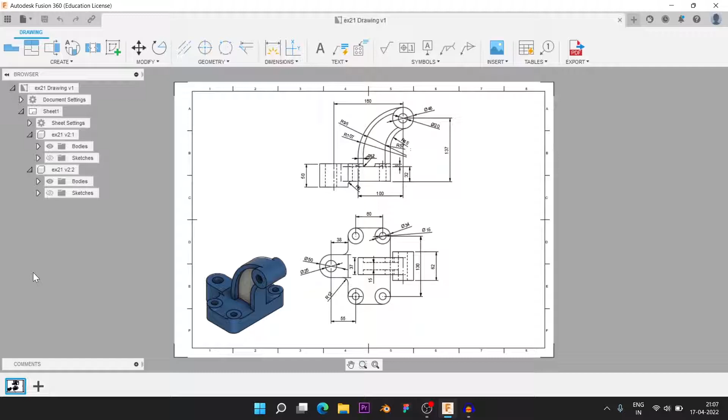Today we are discussing exercise 21. In this exercise, we are creating this model in our component. This is the drafting of this component. Here is the top view and here is the front view. I'm starting from this front view.

First of all, I'm making this sketch. Then I do the extrude up to 32. Let's start.

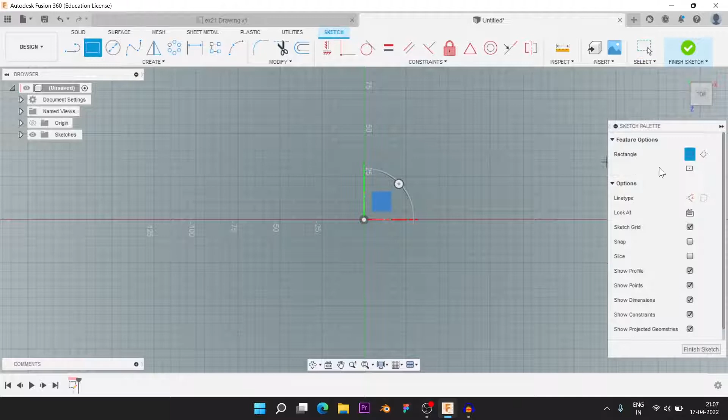Just selecting the top view and making one here rectangle. I'm creating here the center rectangle like this.

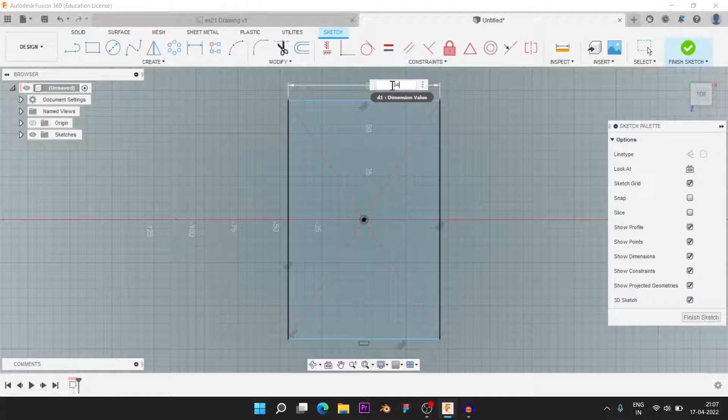After that, I'm giving the dimensions here. It will be 60 plus how much, here 17 and here 17; 60 plus 34 and here 130 plus 34. So giving 60 plus 34 is nothing but 94, and 130 plus 34 is nothing but 164.

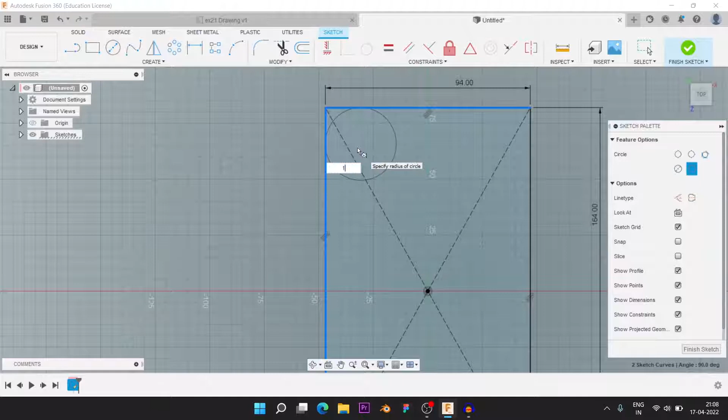Yeah, like this. After that, just I am giving here two circles. The circle will be a two tangent circle. The first tangent is this, and the second circle, how much radius is it providing? So I'm giving the radius here 17, like this.

Now I am creating one more circle over here of diameter 15, like this. Yeah, diameter 15. Second circle is of diameter 15.

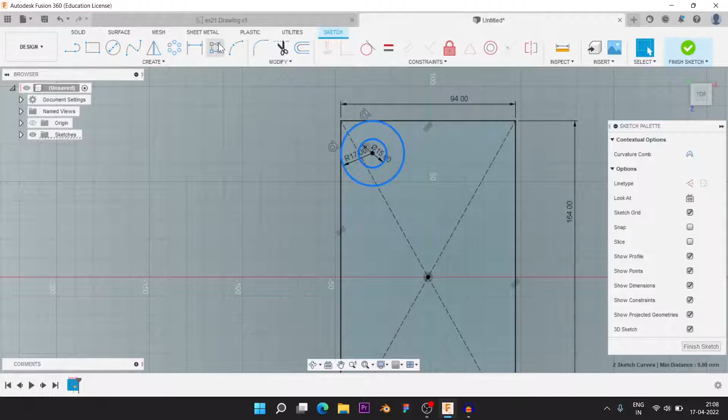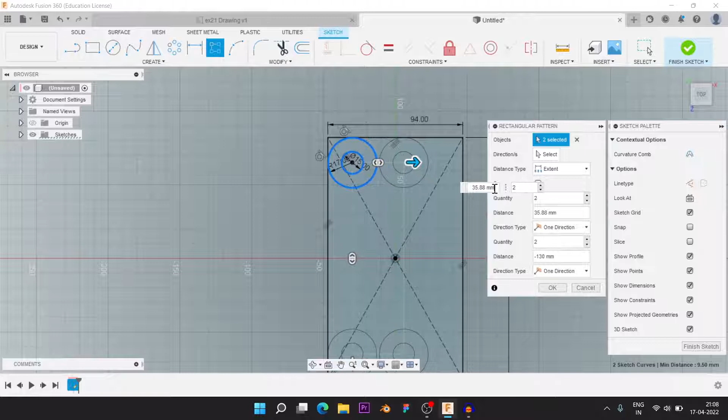And now I'm selecting both two circles like this by pressing Ctrl and doing here the rectangular pattern. Just moving this arrow somewhat like this, and here the quantity will be 2. The distance I am providing in the downward section is minus 130, like here. And in this direction the quantity will be 2, and the distance I am providing here will be 60, like this, and enter.

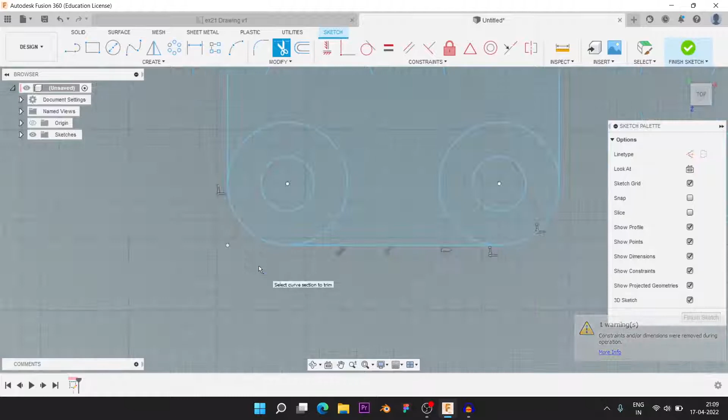After that, I am trimming the unrequired section, which is this, same here and this, here too, like this. Perfect. After that, just making this section over here.

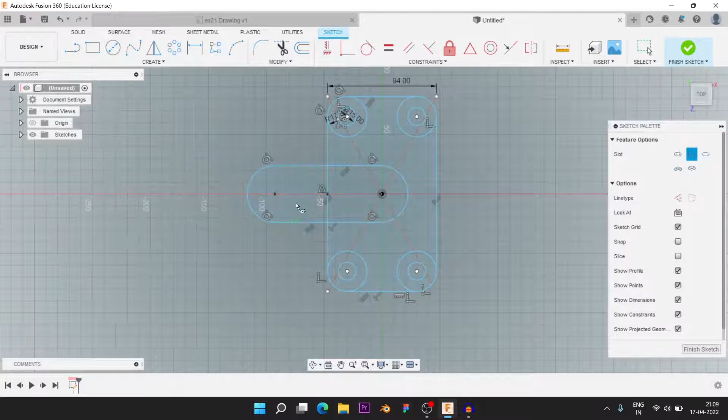For that, I am using the slot feature over here, slot, and here I am using the center point slot. The center and here the slot like this, and just taking the slot like, and just giving the diameter.

Here it is 50 and 25. Two diameters as providing like this. One is circle like this. Just giving the radius here is 25 and the diameter here is 25.

I think so, let's see once again. Yeah, the diameter is 25, and the outer circle here is of radius 25, like it.

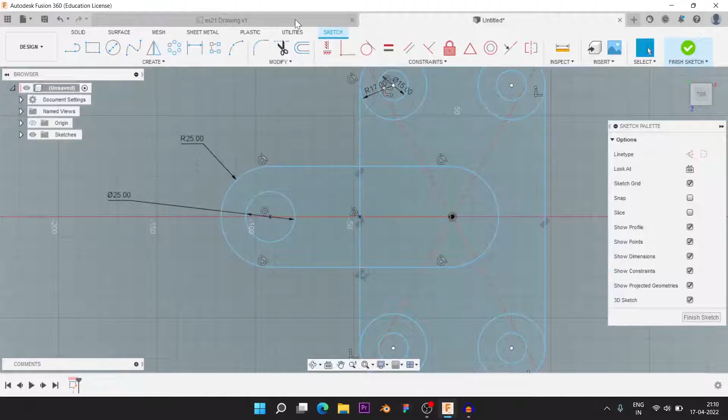And just the distance as providing from here to here is 55. Just go to the distance from this point to this point. Here it will be how much? 55, like this.

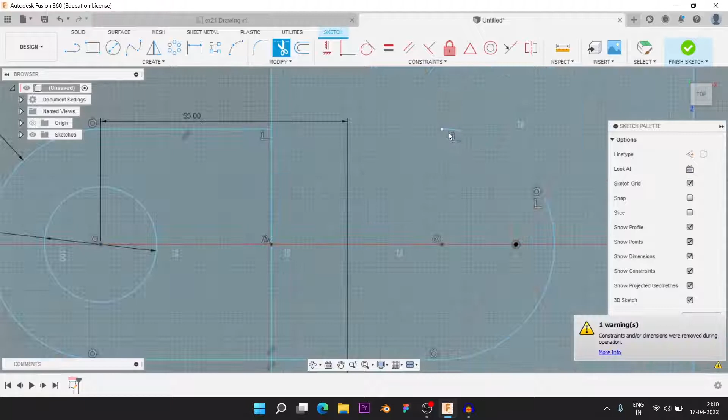Perfect, and just trim the unrequired section, this. Here and this section I doesn't require, here too. Perfect, like.

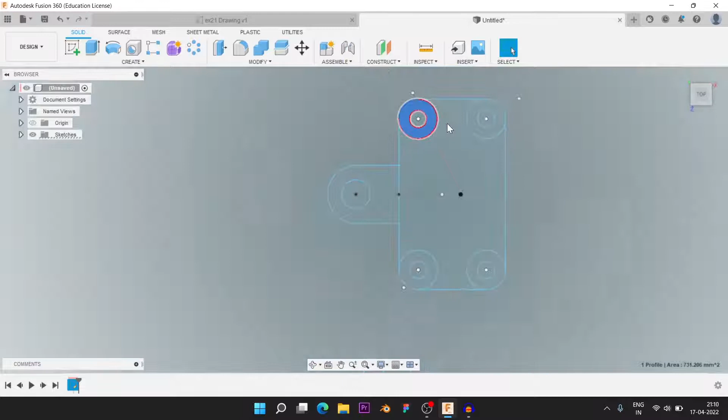After that, just finish the sketch and just select the required section. I'm selecting this outward section here like this, but I doesn't require this. Just pressing the Ctrl key, it unselected like here, and I doesn't require this line too.

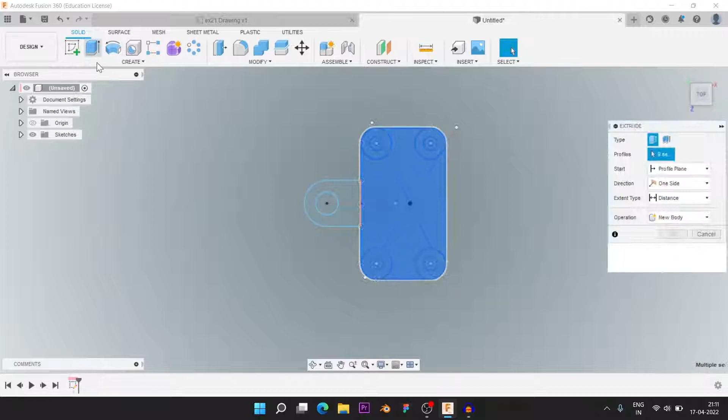Now I'm using here the extrude feature. I want to extrude up to how much? Here 32 mm. Just go to the extrude and orbit it somehow, and just providing the value in the negative sense, so minus 32 like here, and then OK.

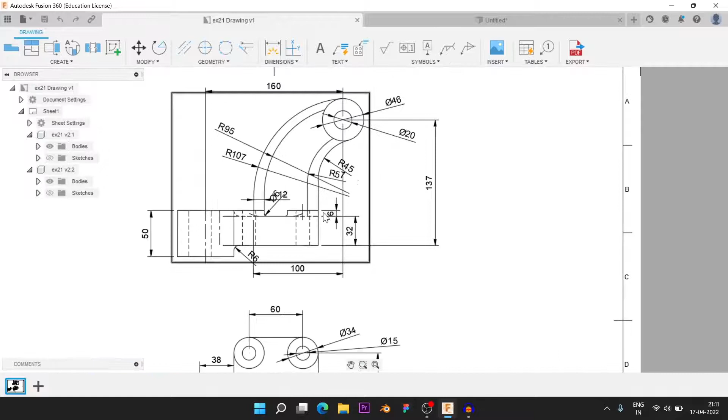Just go to the sketch, visible the sketch here, and the outer circle is extruded up to 6 mm. For that, I am selecting these circles first by pressing Ctrl like this, and just providing the extrude up to 6 mm.

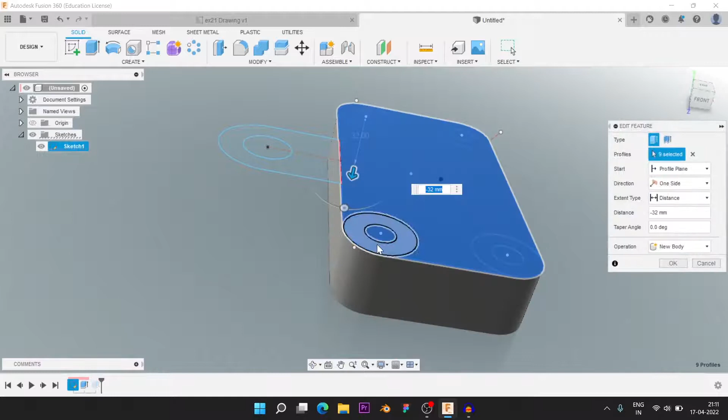Like this and enter. Once again, I'm going to this feature, just selecting by pressing Ctrl and selecting this circle for the whole feature and here. Then okay, like this, perfect.

After that, there is an extrude of this feature or this part, but in two sections: the first section is at 6 mm and another section is at 44 mm. The total goes to 50.

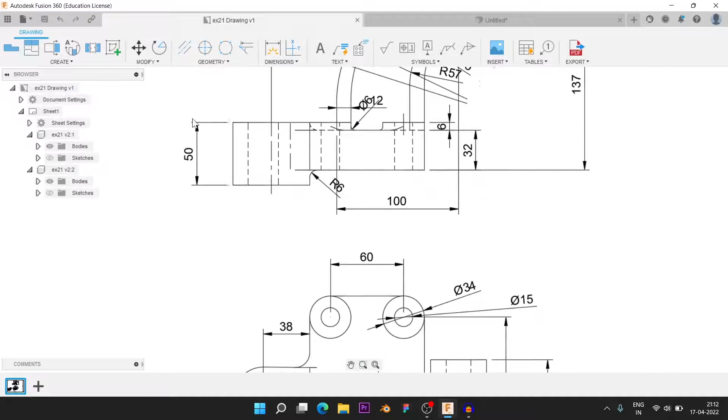For that, I am selecting this profile and the direction here I am using is the two side. The first side here, upside, it will be 6 mm, and the downward side it will be 44 mm. This total is equal to 50 mm. Then enter.

For making this section, I am using the front plane. For that, just go to the sketch and selecting for front plane here, like this. Once again, just finish the sketch.

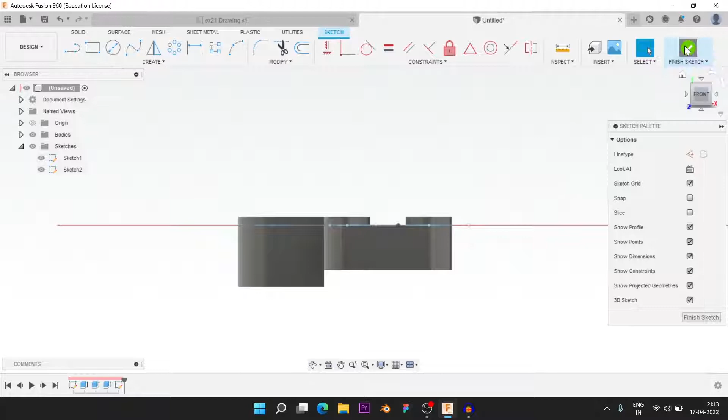Like here, just I am deleting this sketch and sketch, selecting this profile and front. Yes, perfect. Now I'm making the circles.

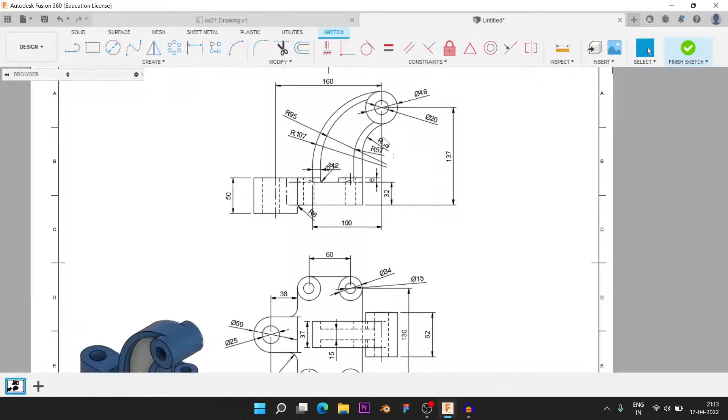Like these two circles I am making first of all, and just giving the dimension. One is 46 and another is 20. So the dimension 46, enter, and another is 20 here, like this.

After that, from here to here, the dimension provided will be 137, and from here to here it will be 160, or the center of this circular section or the slot section, it will be 160.

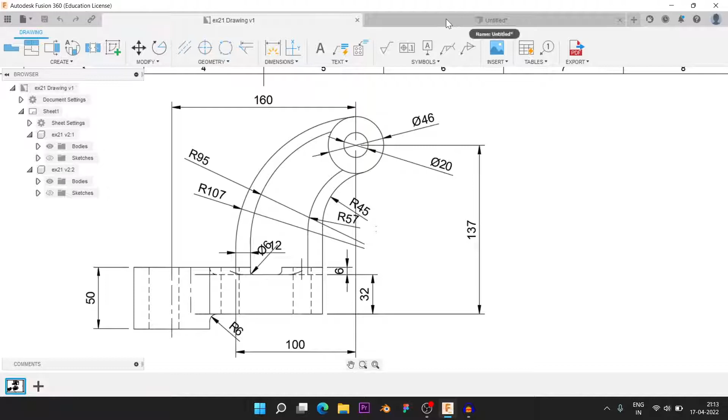Means from this point to this point in the horizontal sense, it will be 160, enter, and here it will be 137. I am right, 137 and 160.

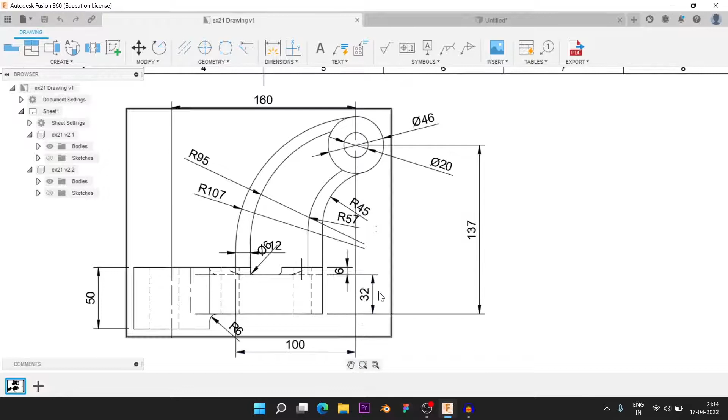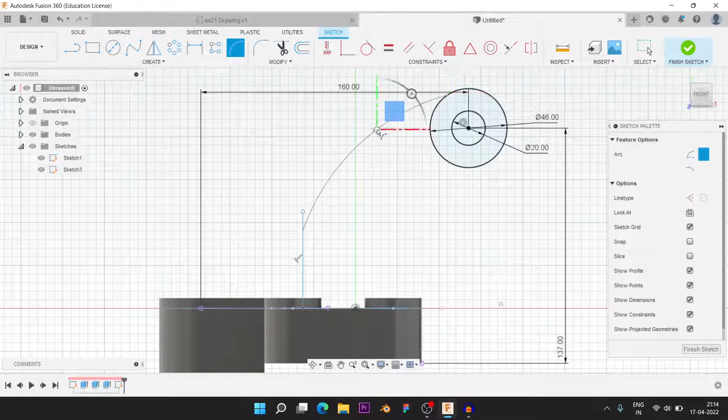Enter. After that, go to the 3-point arc, selecting any random point, and making this one arc. After that, I'm going to the constraint and using the tangent constraint, making this line and this profile tangent.

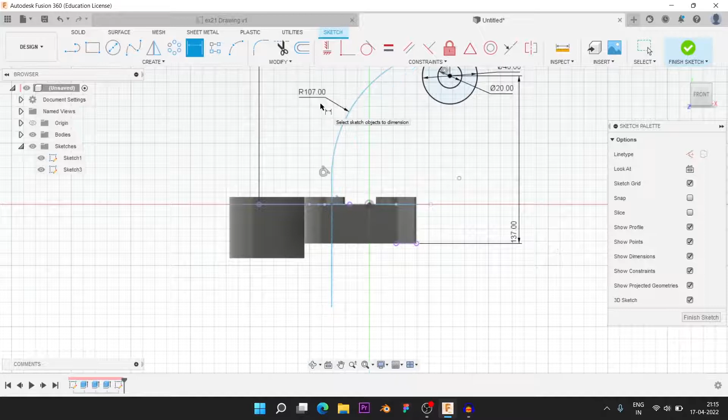After that, going to the coincident feature, selecting this point and this point as coincident, and providing the dimension of this arc. It will be 107, and the distance 100. So distance here, how much? 107, and from the distance here to this point, it will be 100.

Enter, like this. But this point is connected to this line. For that, I'm using the coincident feature and selecting this line and this point.

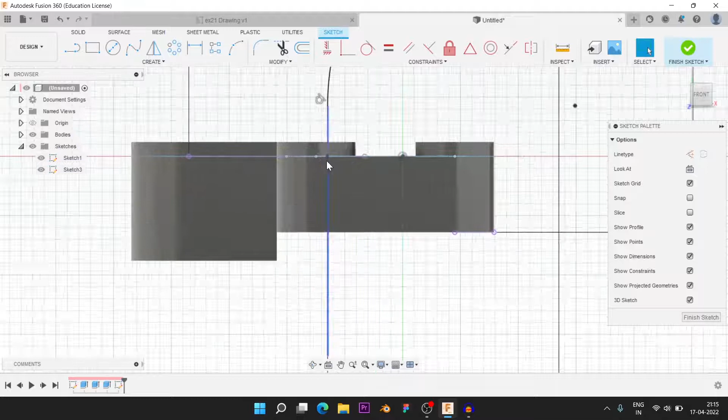Let's just trim the unrequired part. I want the line up to here only, but the tangent is perfect, and here also tangent. The main important thing is the tangents and the line.

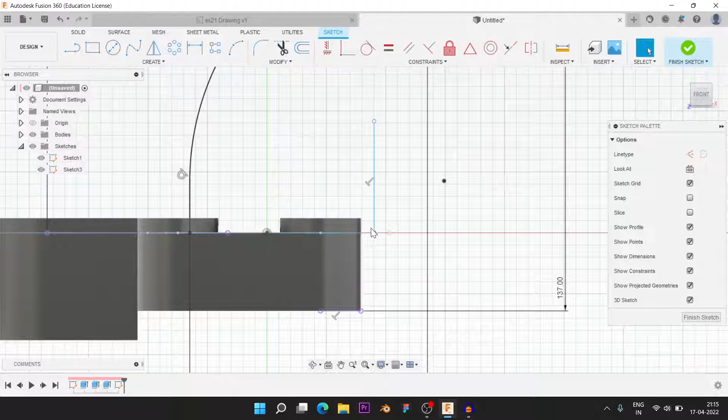The next line is providing over here. For that, I'm making a random line like over here. Just go to the coincident constraint and select this point and this line. After that, I'm making once again the tangent arc feature like this.

Go to the tangent. This arc and this circle will be tangent over here, and giving the dimension here the radius of 45. Here it will be 45. Enter, like this.

After that, just making this point and this point will be coincident, like yes, same. It's perfect.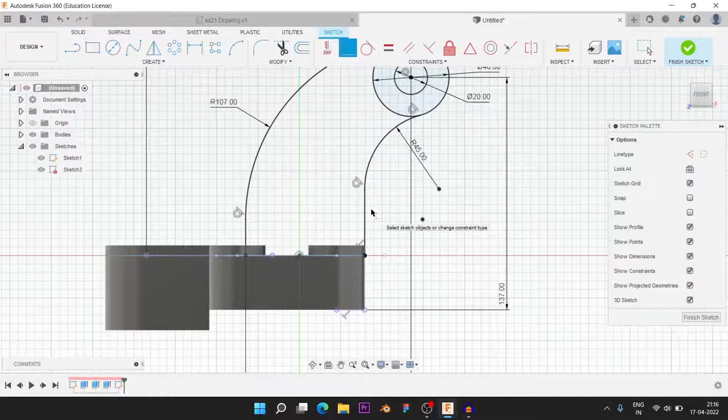Now just finish the sketch. Before finishing the sketch, just close the sketch first of all. Closing the sketch here. Now it's closed. Just finish the sketch.

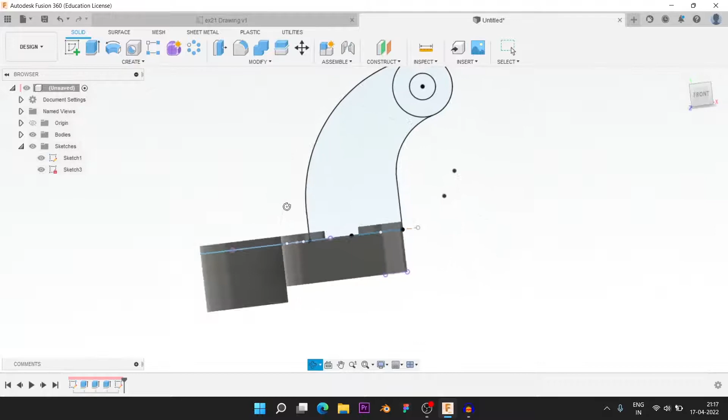After that, just rotate it somehow like here and extrude it up to how much? 37. In the symmetric direction, the whole distance will be 37.

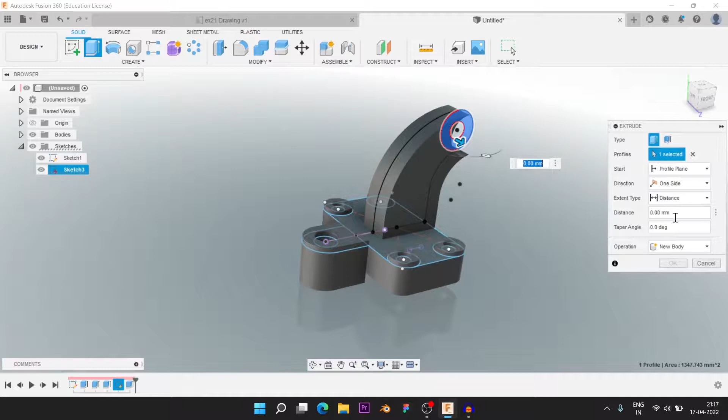Enter, like this. Just once again visibling the sketch and selecting this sketch. After that, use the extrude feature over here, and the distance of the extrude as providing over here, it will be 62. Just select the sketch first of all.

Just selecting, extrude it up to. Here I am providing the distance. Extent type will be direction, symmetric, and the whole distance is how much? 62. And here, enter like this.

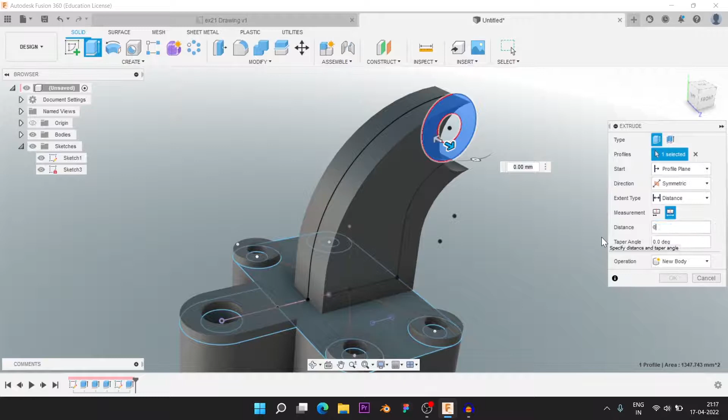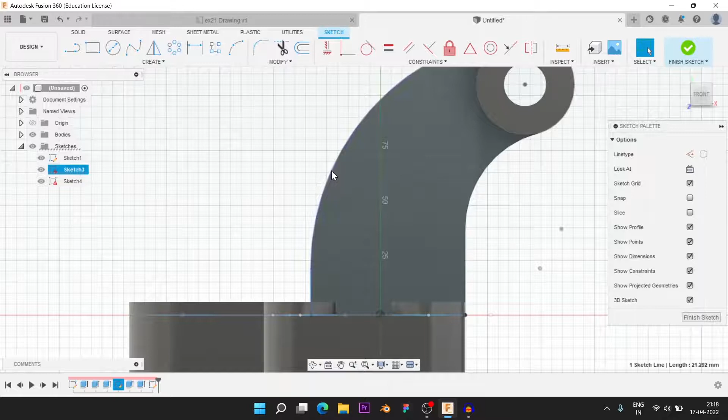Now making this section over here, I am using this plane as our sketch plane. Just use the sketch and select this profile. Yeah, this profile, and project this profile over here.

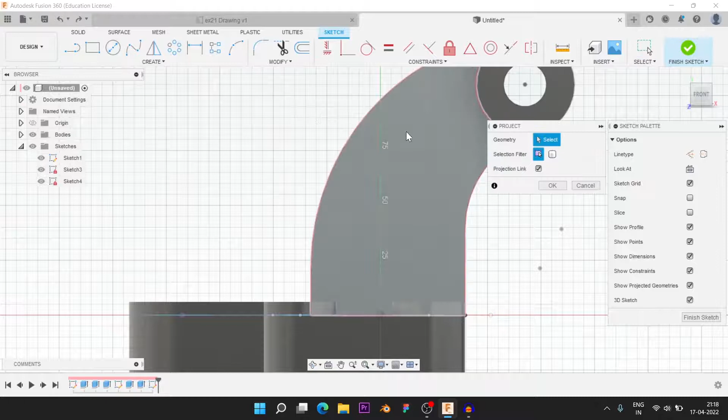Okay, like this. Go to modify, offset, selecting here too, but the line has not come. By pressing P, the project shortcut has opened. Just select this line and this here too, like this, and then OK.

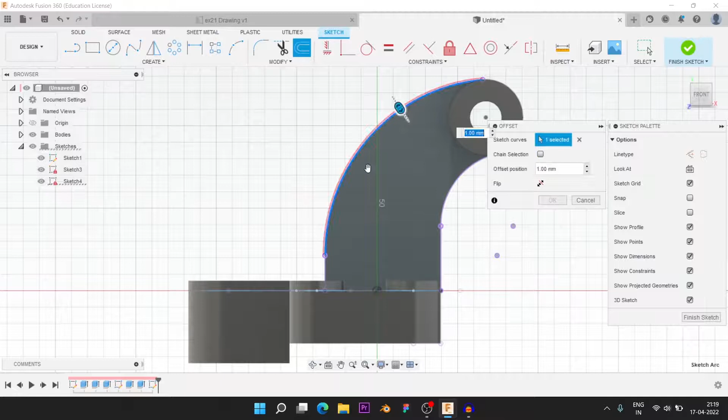Modify, offset, just chain selection, selecting this point like this, and giving the offset of 12 mm. Enter. Same goes here, offset, selecting this and this section and offsetting about minus 12 mm.

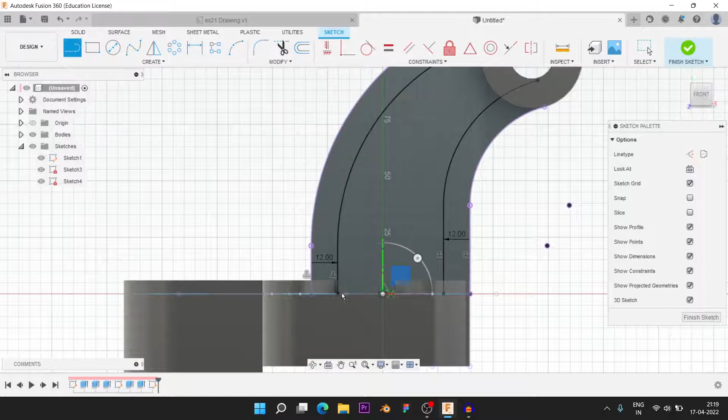Just close this sketch by using line and projecting this circle using P on the keyboard, like this, and just trim the unrequired section. Then here, I required this section. Just finish the sketch here like this, and select this profile, extrude, and I want cut.

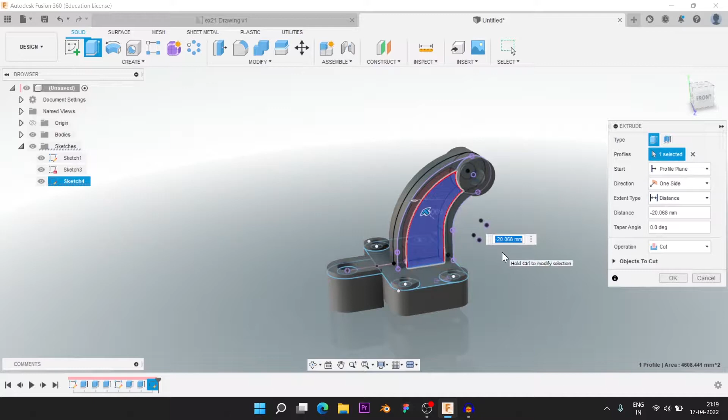So in the reverse direction, it will be how much? Minus 11. How 11? The distance as providing 37, but it goes up to how much? 15 mm only. Here, 37 minus 15 goes to 22. In one direction, it will be 11, and another direction, it will be like this.

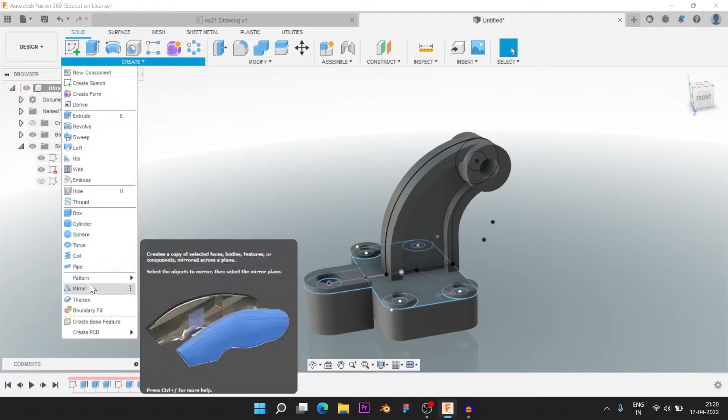For making another section, I'm using here the mirror feature. Mirror, selecting the feature here, this, and the plane, it will be which? This plane. And OK, like this, our section has been completed over here.

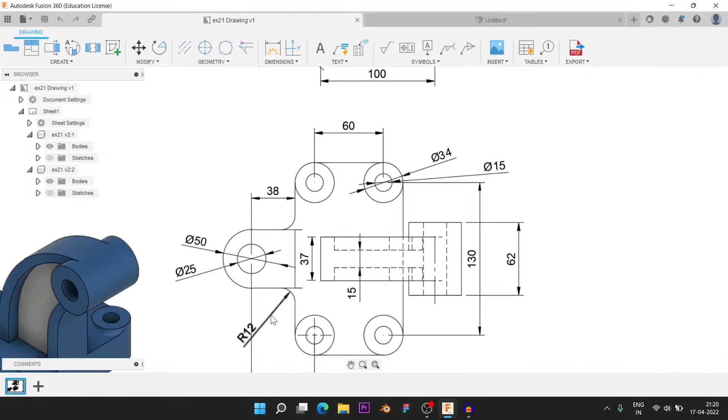Just turn off the sketches so it shows properly. There are fillets remaining. 3 fillets are remaining: the first is 12 mm here, and another is 6 mm fillet, I think. Yeah, 6 mm diameter fillet, and a 6 radius fillet has been provided. Let's go.

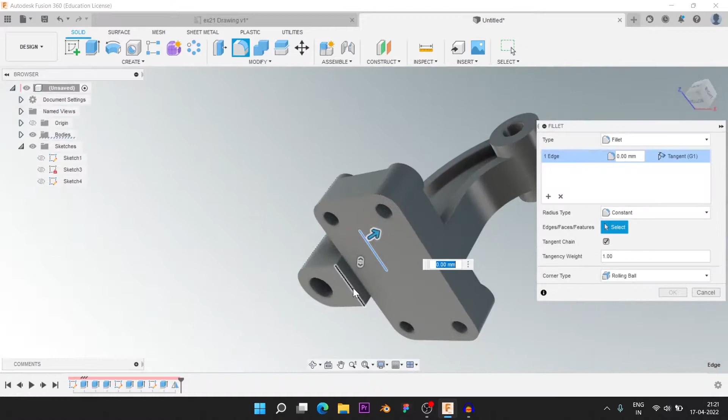Here is the first fillet, orbit a bit. Just pressing control, selecting these edges, and giving here 6. Enter.

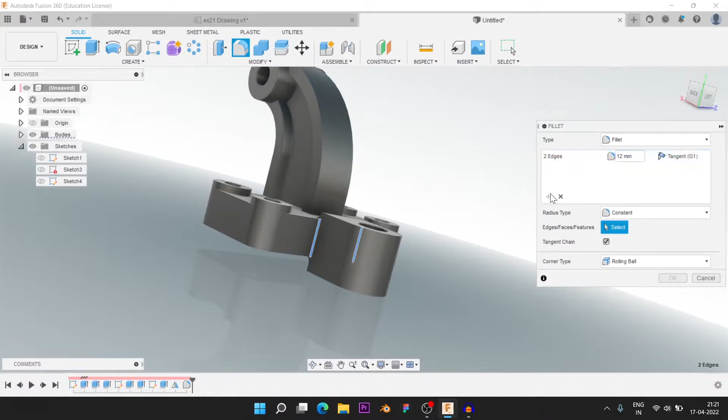After that, another 2 fillets. Fillet, selecting these edges and orbit somehow. Here, 12 mm. And just pressing the plus sign here.

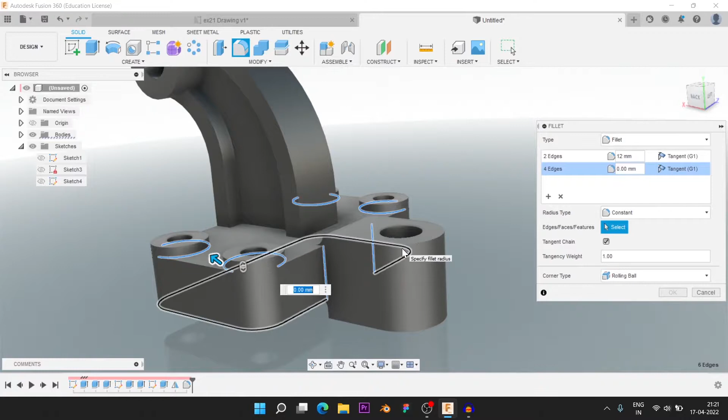Here I am selecting this, and this, and here, it of 6 mm. Enter. Like this.

All the fillets are completed. Like this, we can make this type of model by using Fusion 360 or any other software by applying the same features and the same content.

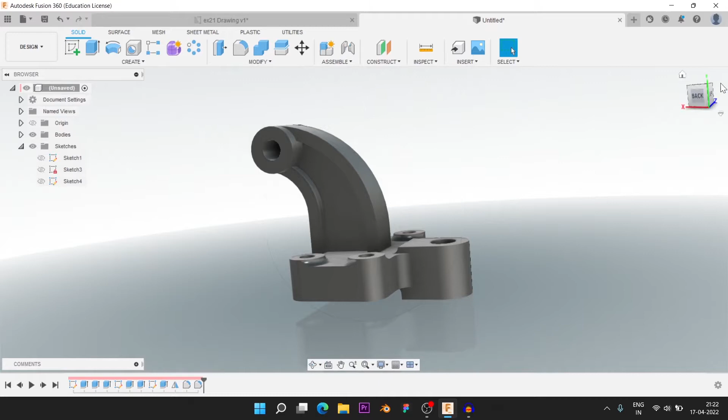Now we always go for the render feature, render, and giving the appearance here. I'm using the color, metallic color only, metals, aluminum, and here I'm using this blue color. Okay, you can give any different color as per your aspect, like this.

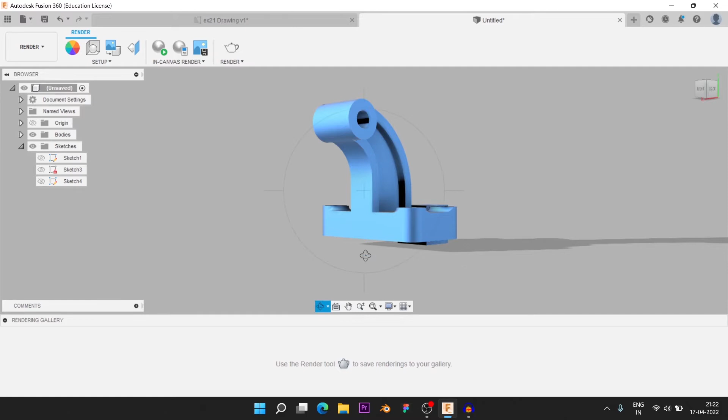Like this, we completed our exercise 21. I hope you got this exercise.